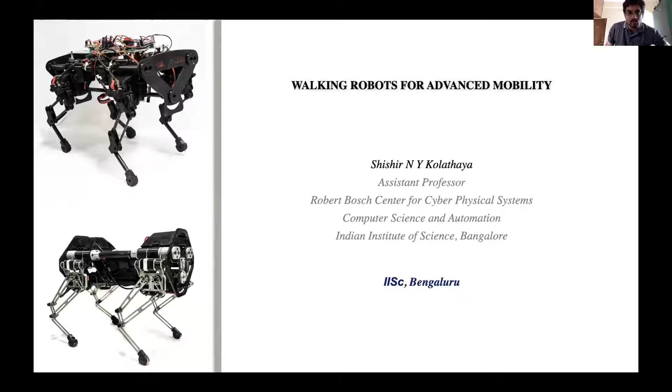I don't see the slides. One second. You are able to see the slide? Now we are not seeing, sir. Now it is not seen. Not visible. This is a real problem. Yes, sir, some technical issue. Okay, now yes, sir, it is visible now. But I'm not able to click play.

Yeah, it is. Yes, sir. You're able to see the second slide, right?

Yes, sir. Okay, so my focus here is actually robotics and machine learning. So I mentioned reinforcement learning. I will talk about reinforcement learning towards the later part of this talk.

But my main background is actually robotics. So I've done a lot of work on robotic systems. And to bring you some perspective on robotic systems, as to where we are in terms of robotic systems compared to machine learning, I wanted to show this graph.

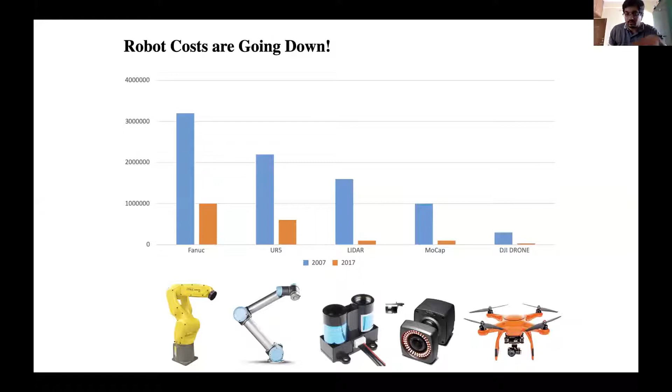Cruise acquires Strobe to help dramatically reduce LiDAR costs. So Cruise is also bringing the LiDAR cost down by close to almost 90%. So that's the reason why robotics, right?

And I have done a lot of work on robotics, and this is a quick look at my background. So I started with this little dancing robot. This was actually during my undergraduate years, where the goal here was trying to realize dancing on this little robot.

Are you able to hear the music? Yes, sir. Okay, great. Yeah, so this is something that I did as an undergraduate student.

And this is what I have as a PhD student. I continue doing work on this. So I've done a lot of work on trying to achieve walking robots, realizing walking robots for a lot of applications. And this is one example where we show it can achieve a bunch of behaviors and even dance to the music.

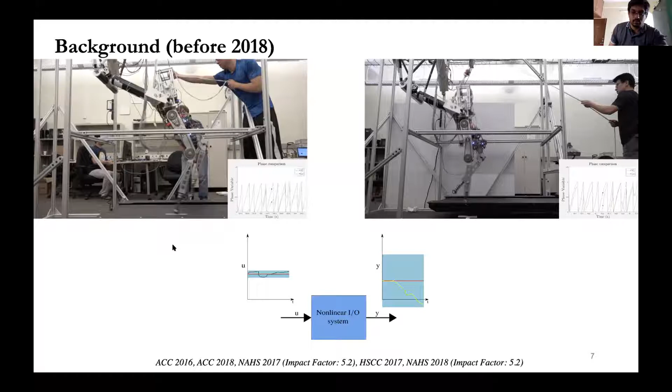But my main PhD thesis was actually running, so this is showing the running robot. Here is a picture of this robot on the left, where I'm actually sitting in the background trying to control the robot, and I'm also assisted by two other people. The goal is to try to stabilize the running gait by reducing a bunch of uncertainties. Here it's actually phase uncertainty, and as you can see, after trying to reduce the uncertainty, in other words improve robustness, we are able to achieve running.

Are you able to see the entire slide? I hope you can. Yes sir, we are seeing. Okay, the whole slide, right?

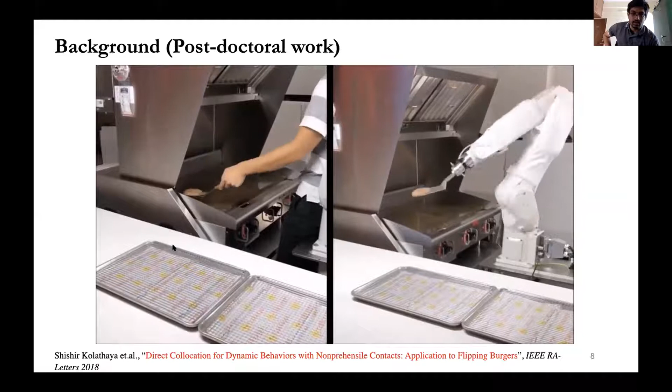Okay, great. So as a postdoc, I've done a lot of work on trying to bring robots into the industry. So this is an example of a robot used in a restaurant industry. Here, this robot is actually moving its spatula from one point to another, trying to move it here and there, and then also trying to flip it over.

So we can see that the comparison between the human and the robot is remarkably very close. In other words, it's super fast.

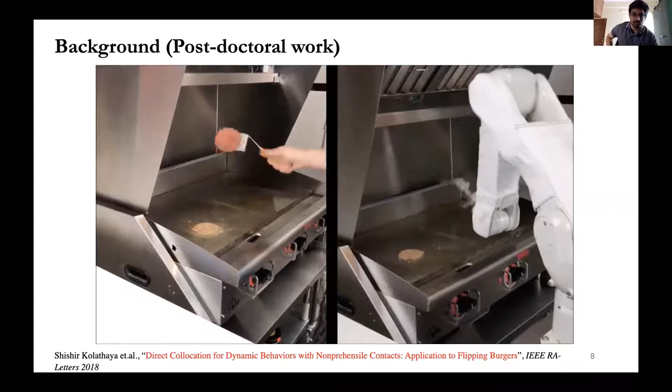Okay, so with that, let me talk about a robot. So what is a robot? I use this definition from Wikipedia: a robot is a machine, especially when programmable by computer, capable of carrying out a complex series of actions automatically. And if you look at the origin of the term robot, it was first applied as a term for artificial automata in 1920.

The word robot itself was not new, having been in the Slavic language as robota, which means forced labor. So we treat robots as laborers, as a slave.

Now the question is, can we use legged robots in the field of agriculture? And is it even possible? Here is a little video which I actually took from my dad's farm. Like I mentioned, my dad is a farmer, and he has been working on this for quite a long time.

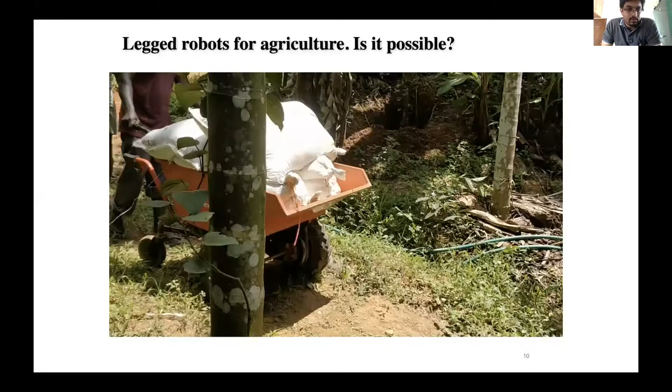This is an example of fertilizer being carried using this petrol powered cart. He is able to do it with ease, but it requires a path. Also notice the other person here actually carrying the pipe, to make the way, to clear the way for this one. So this is something that we have to be thinking about.

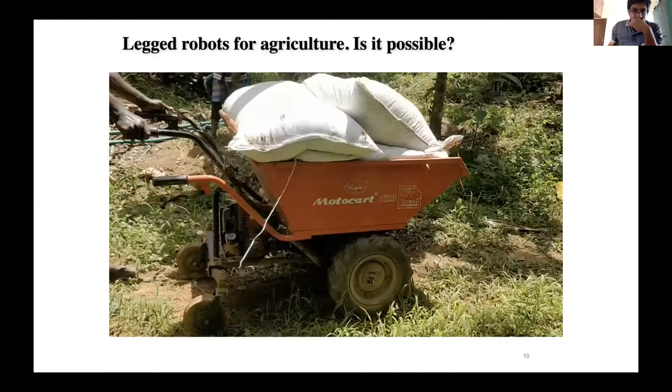Like when it comes to wheeled systems, this pipe is in the way and this is causing a problem. Now, there are quite a few applications that we can think of.

So this is something that farmers are well versed with. Every day they go outside, look at each and every plant. They have to tend to each and every plant. They need to make sure that every plant is growing well. And if there is a problem, then they try to fix it.

Now, this is something that we expect a farmer to do. Now, the goal is to have a robot do something similar. And not just that, the robot has to be able to go across all kinds of terrains, not like this terrain, any kind of arbitrary terrain that is seen on a farm.

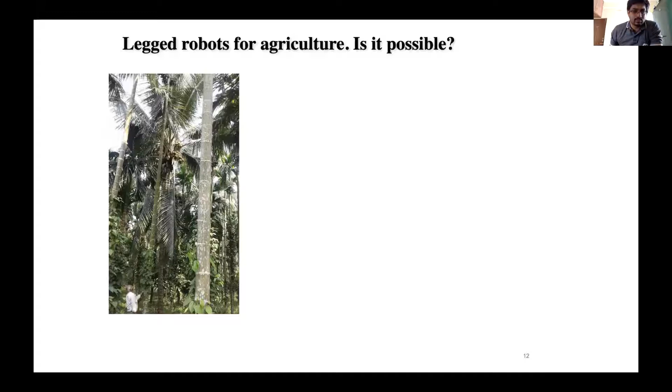Similarly, in the field of grafting, there's a lot of potential use of making this happen, and lots of other kinds of farms too. So my goal here was to try to bring in a one device solution, something like a human.

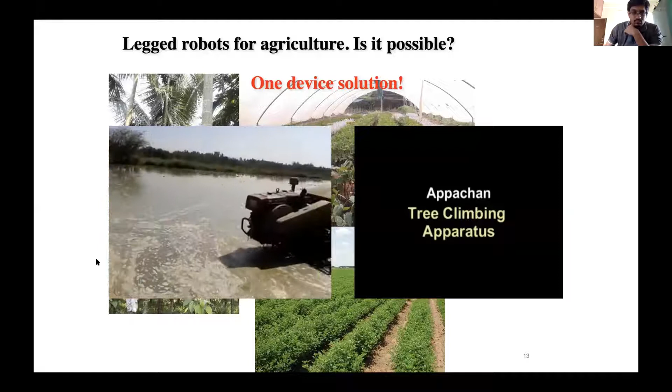On one side we have this tiller being used to till the paddy field, and here we see a person using a remote control to do it. This is one potential application. Here's another application where a farmer uses this climbing device to go up the tree. Now when I look at these two things, these are all very effective, very customized solutions.

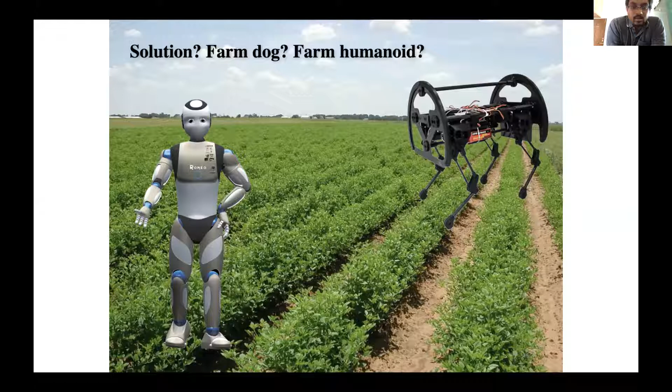I was thinking, why not come up with one device solution to solve all these problems? On one hand we have drones, on the other hand tractors and lots of other devices. Can we think of using a legged system, say a farm dog or a farm humanoid system, that can do a multitude of tasks? The reason is simple: if we have one device able to do a multitude of operations, costs are much lower. It's one hardware, but a multitude of tasks.

That's the reason I use this robot. I bring in this idea of using a walking robot. So we have a four-legged robot which can walk on all kinds of terrains. If you want surveillance, we put a camera. If you want harvesting, we put an arm on this robot. If you want it to climb the tree, we simply write a new controller, and the robot can use the same set of legs to climb the tree.

So this is the solution I was thinking of, although we have a long way to go, especially when it comes to climbing, which is an extremely complicated, harder problem to solve. The moment we talk about this setting, there are thousands of technical challenges, starting from AI and machine learning to real-time control, visual odometry, efficient actuation, stabilizing control laws, rough terrain navigation, safety critical control, path planning, and so on and so forth.

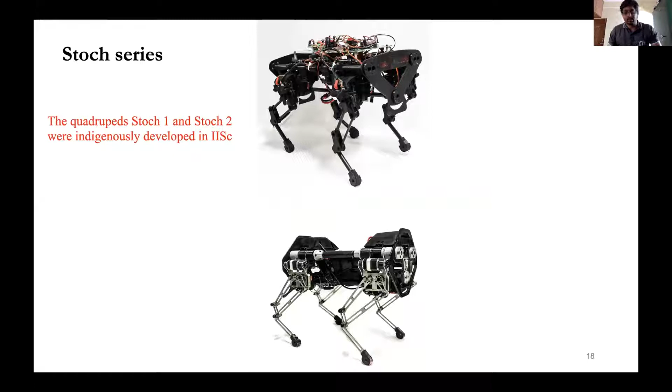So my solution here is to use a Stoch series of robots. The quadruped Stoch 1 and Stoch 2 were indigenously developed in IISc, and I want to talk about how we can build on top of this to a farm situation. Just a disclaimer: I do not have any solution right now for the field of agriculture. I just wanted to indicate where I'm potentially going with these robots.

Now I'm going to switch my attention towards how to realize walking in these robots. One reason is because I do not have a lot of results to show in the field of agriculture—in fact, I have none. Although I'm going towards it, I have a long way to go. Like I mentioned, there are potential use cases for this kind of platform, and there are technical challenges to be solved first before we even talk about using this in agriculture. That is where I am right now.

I hope this is clear. So we have these two robots. Now the first step is to realize walking in these robots, and that is what the whole presentation will be about. I will pause here for a moment to take any questions if there are any.

Any questions? Okay, I'm assuming no questions.

If there are no questions, I will set the goal just to set the tone of this presentation. So the goal is to realize walking in the robot Stoch 1 and Stoch 2. This is what I'm going to focus on, and this is what we have been working on for the past 2 years. We have come a long way.

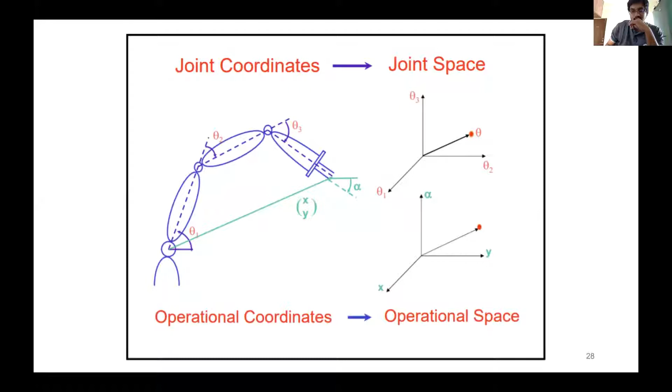So similarly, we have this concept of rotation. I talked about translation, right? There is also this notion of rotation of the end effector, because the way I pick an item, the orientation is actually very important. So we have this rotation matrix, and we want to apply this rotation on the system. There is this matrix called an orthonormal matrix, which we use to realize these kinds of orientations.

Let me just say this, because more than this would be too much. Also, it's not just positions and orientations that we care about, we care about dynamics. We need to make sure that Newton's laws of motion are all well satisfied, and all the forces are meaningful. So we have the Newton-Euler formulation, the Lagrangian formulation, the generalized constraint coordinates, and kinetic energy. This all goes back to 12th standard physics. We need to make sure the physics is meaningful.

With these kinds of formulations, we have different kinds of forces being applied on each and every joint. When a force F is applied on a joint, that F gets applied to the parent link and then the successor link, and this is happening in a repetitive fashion. With this, and with Newton's laws of motion, and the extension of Newton's laws of motion to the field of rotation, we apply the dynamics.

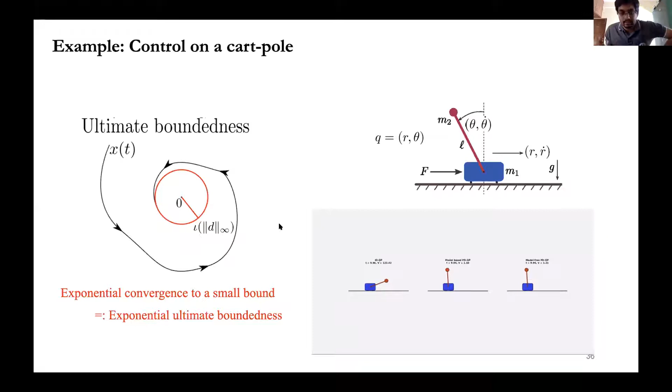The second and the third ones were applied successfully, and the first one is a controller that did not work really well. We actually do these kinds of iterations, applying different types of controllers and seeing which one works. The second and third worked, and as you can notice, it's not perfectly vertical, it's actually oscillating around the vertical region, inside this red circle. So it's always close, but never exactly zero. This is what we have in our system also, so this is a practical scenario.

Now with this, let's talk about walking.

Let's talk about how to use this dynamics idea, this control, and this boundedness idea in the field of walking robots. So the goal is to achieve walking. Walking is an extremely hard problem, and people have been working on this for quite a long time.

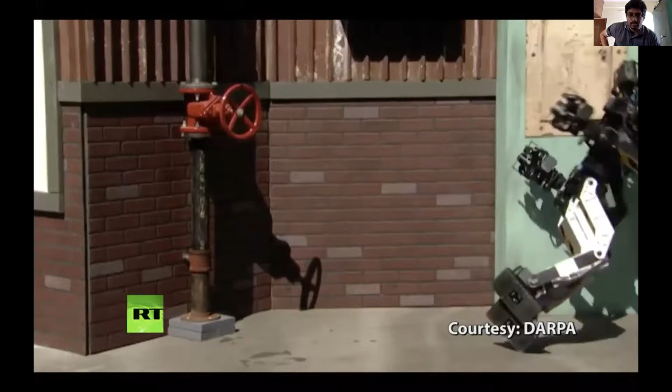We have quite a few robotic systems being tested here. This is actually part of the robotics challenge. So these robots, they walk and then they fall down.

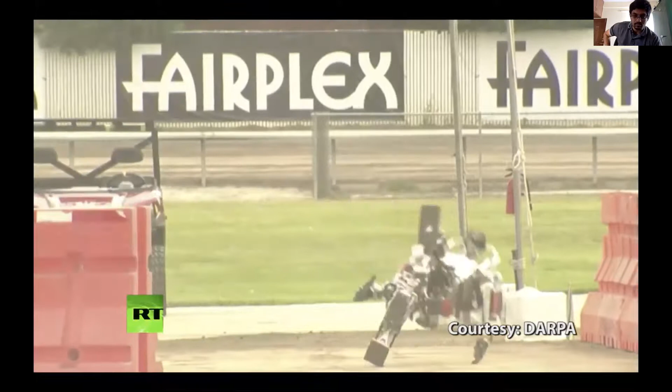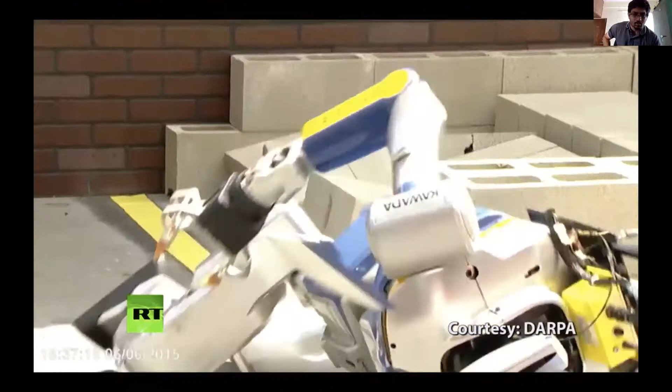So walking is an extremely hard problem, and we have thousands of problems that we need to deal with. Let me play this for a moment just to digest the fact that walking is not an easy problem. This was actually in 2015, not so long ago, and almost all of the robots had these kinds of problems. None of them were working really well.

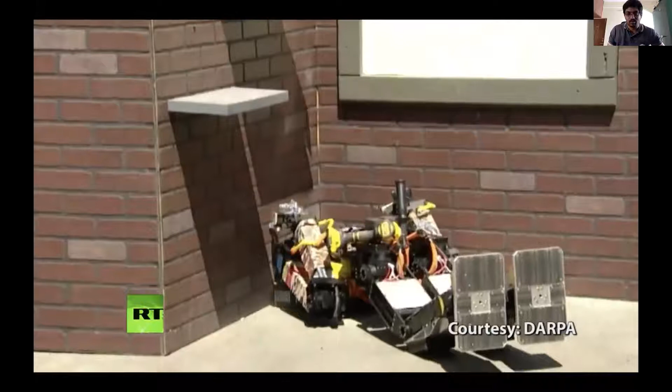If it's not even able to walk properly in a well-designed environment like this, then we can't even talk about walking in a farmland. We have a long way to go. Right, so with that, let me go to the next slide.

So we have used machine learning concepts to realize walking, and it's not just us that has worked on it. Companies like Google have used machine learning, in fact the idea of reinforcement learning, to achieve walking. On the left-hand side, we have this little robot achieving walking by using reinforcement learning.

On the right-hand side we have this bigger robot with a very robust controller, so if you kick the robot it does not fall over. All of these use the idea of reinforcement learning, and that's what I want to introduce here.

There are several positives to take from these deep learning ideas, because we have seen an explosion in AI. Number one, there are a lot of tools available, like TensorFlow, Torch, simulators, GPUs, TPUs, which can be used and are widely available right now. Number two, they are all easy to understand, with hundreds of online resources which we can use to make this happen.

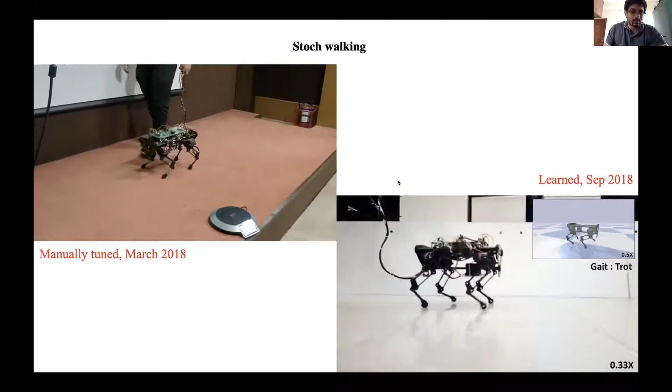...we were able to use this idea of machine learning, to be more particular the idea of reinforcement learning, on this walking robot to realize this. As you can see, the slow motion version of this robot itself is much faster than the normal walking speed of the robot on the left, so in terms of efficiency it is much, much better.

So here is the general framework that we use to realize walking. We have a little walking controller, shown in a box. It's usually a tracking controller with some auxiliary inputs, and this walking controller sends in some actuations, some action values.

So we have actuation and then we have sensing. The sensing uses some sensory values and sends it to the controller, and the controller uses the actuation to actuate the robot. With this walking controller, we have a policy network which we want to use, let's say a deep neural network. I use the same idea: I sense the values and then feed the actuation.

Any questions so far? Sir, I think in the chat box they posed questions. Oh, chat box has some questions? Great, yes. How do I access it?

Someone asked, Siddhartha Shankar, what are the parameters? Which parameter, oh the parameter theta? I think somebody said Siddhartha. I would like to call upon Siddhartha Shankar Acharya. Sir? Siddhartha Shankar Acharya, sir. Hello?

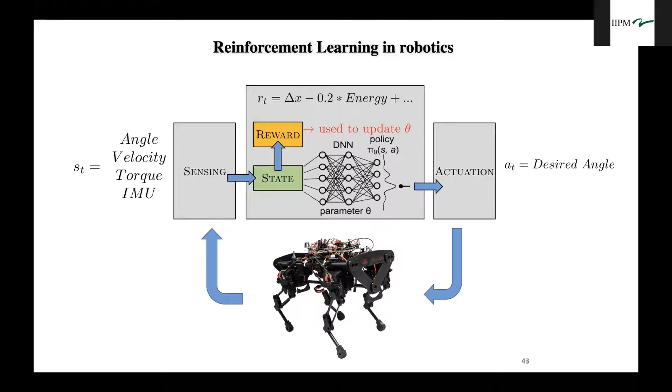Okay, so we use this specific form of reinforcement learning called policy gradient. There's a lot of theory that has gone behind using this policy gradient, and the idea is actually based on using this policy. So policy gradient basically tells me, okay, if I have a high reward because I applied this action, I want to use more and more of that policy. This idea of using policy gradient actually helps me do this, so we use a lot of these policy gradient techniques to realize walking.

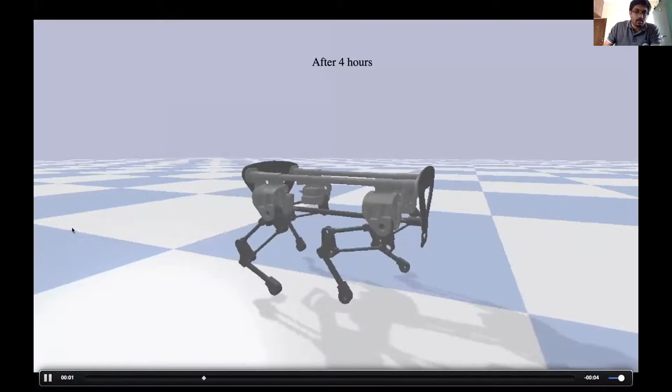So here on the left, we have this example of the training procedure at the beginning. Sorry, okay, so the left video is not working for some reason. I'll show the right video. The right video shows walking in the middle of the training, and it's actually barely somehow trying to figure out how to walk. Notice it's continuously calculating the energy consumed, continuously calculating the distance traveled, and after 4 hours, we have walking. In other words, it's able to continuously improve the rewards as a function of time.

Right, finally we implemented on the robot in this corner. So while the video is being played again, I can take any questions.

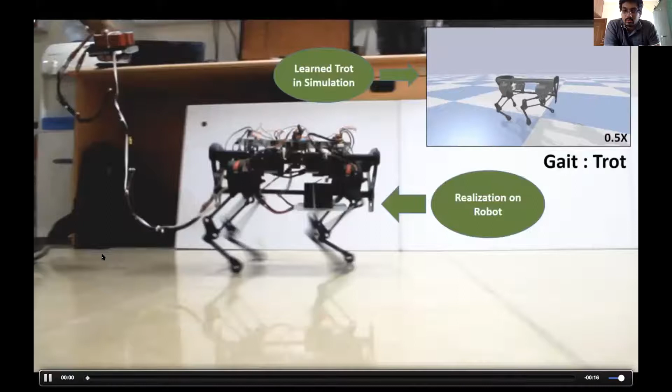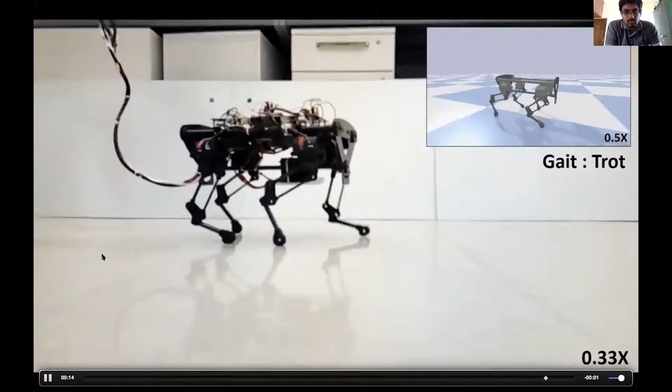How to decide training method to work? So the question is how to decide the training method for the network. Dr. Ram Prakash, can you be more specific, can you ask this question again? Okay, so let me roughly try to answer. There are quite a few training methodologies that are in use. Some are effective for some use cases, others are effective for other types of use cases, so there is a variation, and we decide based on what is useful for us. In our case, we use a lot of policy gradient based techniques, and that's the reason why we have this training method. But training methodology in general itself is a big area, and that requires a careful look at the problem statement, more importantly. I hope that kind of answers your question.

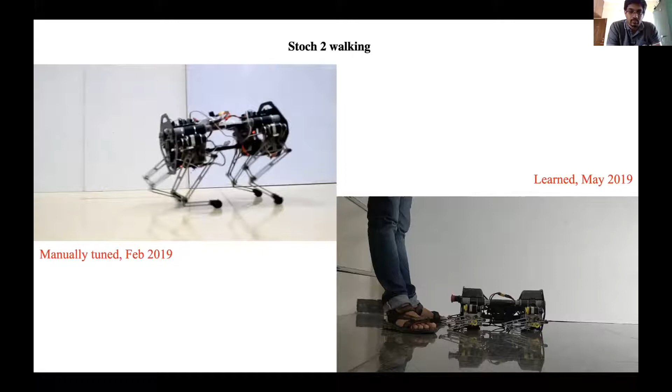Okay, let me go to the next section. So now let me talk about Stoch 2. Stoch 2 is actually a second version of Stoch 1, where we have made a lot of improvements in the robot. The legs are metallic and a lot of hardware improvements have been made. Just to give you an indication of where we were at the beginning, this was in February 2019, it was barely walking, and fast forward a few months and it's already walking really well, very, very robustly.

So here we are actually using this as a gait generating platform. Just to give you an idea, okay, we have policy gradients, what more can we do? And yes, we can do a lot more than that, and we are going to use trajectory generators, and that was the goal in this project.

So here we have this little video of a cat walking. Not sure why it does not play, so it plays when... it plays when I'm not sharing the screen, but for some reason it does not work here. Okay, so let me continue.

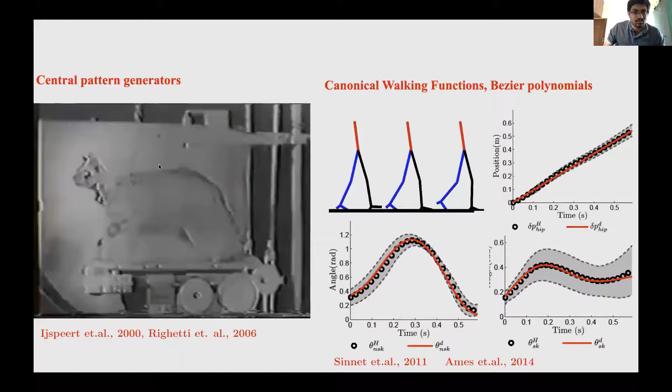So here we have this cat walking on the treadmill, and the point here that I was trying to make was this cat is able to walk really well, despite the fact that the spinal cord is severed. In fact, this is a very interesting problem statement for biologists. In other words, actually the patterns are generated at the spinal cord level. So we are using this idea of using this neural network at the spinal cord to generate these trajectories. On the right hand side, we are seeing a very similar trend, we have this walking data captured from humans.

We can see that the fit, shown in red, on the data, shown in gray, is actually a really good one. This is with a very high correlation. And what's interesting is that this trajectory is actually a very simple function. In fact, it's a low order polynomial.

My point being, instead of applying the system directly, the goal was to use a trajectory generator on the system. So we have this reinforcement learning framework, and we update these parameters in such a way that the trajectories are modulated accordingly. So here we have this walking on this robot accordingly, with these trajectories being applied on the system.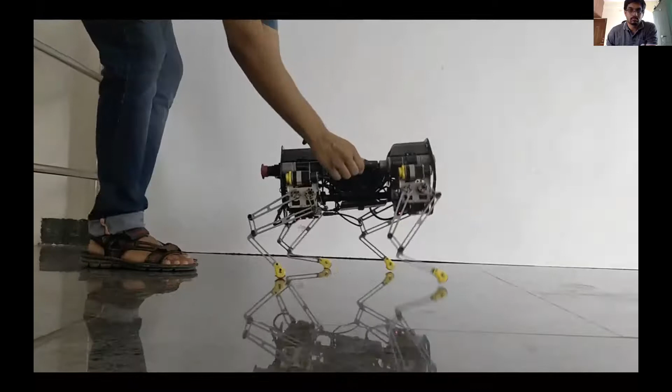So I hope the video is clear. Okay, any questions so far?

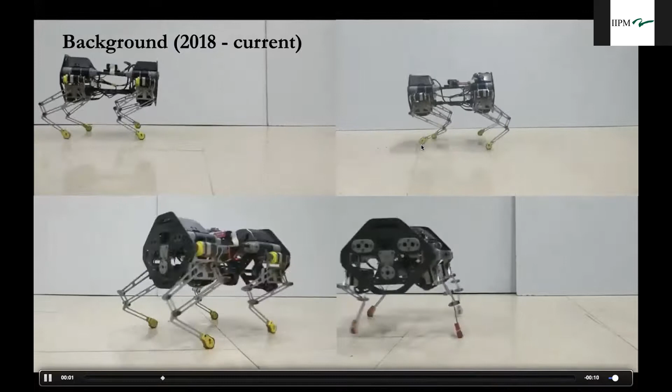Okay, let me go further and talk about the next steps. We have agriculture, not only agriculture, but also construction, transportation, and a lot of other areas in mind. Agriculture is certainly my top priority.

As you can see, the robot we have in our lab is actually a very small robot, not a big one. You could make the comparison by looking at this person - it's mostly 2 times the length of the foot. So this robot is not all that big.

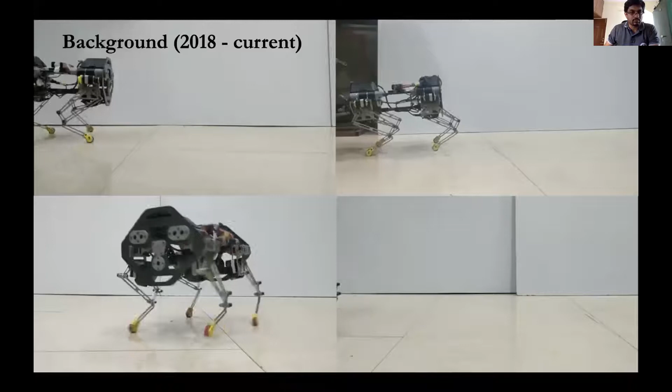That's the reason why we decided to go for the next robot, which is Stoch 3. Stoch 3 is going to be much bigger, and hopefully we should be able to get this walking robustly. Once that is done, we are going to go ahead and test it on different kinds of terrains, including farmlands.

We have Stoch 3 working partially in simulation - for example, it's able to walk straight and do backflips. This is still under production. We still need to buy parts, test the controllers, and make sure nothing is breaking. So we have a long way to go.

This is in collaboration with faculty Bharadwaj, Shalabh, Ashitava, from the Robert Bosch Center for Cyber-Physical Systems. We are developing a bigger, stronger quadruped Stoch 3 at IISc. Hopefully by next year end, if there's an opportunity for me to give a talk again, I should be able to talk about the results on Stoch 3.

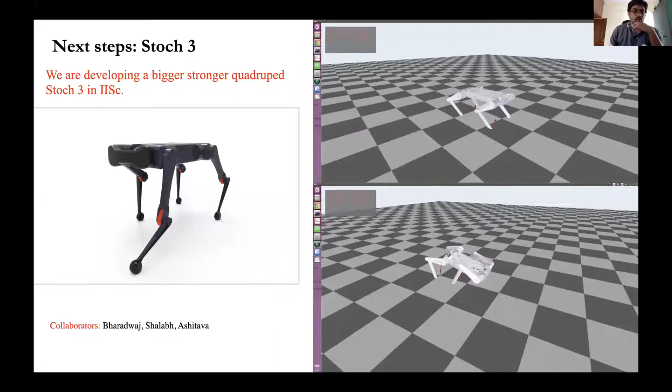So just to give you our vision at the Center for Cyber-Physical Systems - we are actually interested not only in AI, but in deploying AI in real hardware, because that is where the real challenge is right now. On the left-hand side, we have this mind.

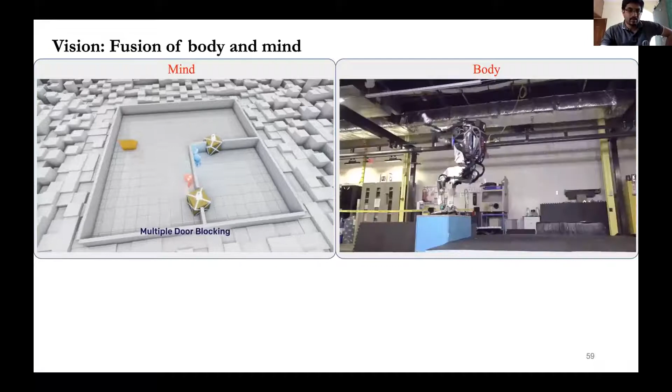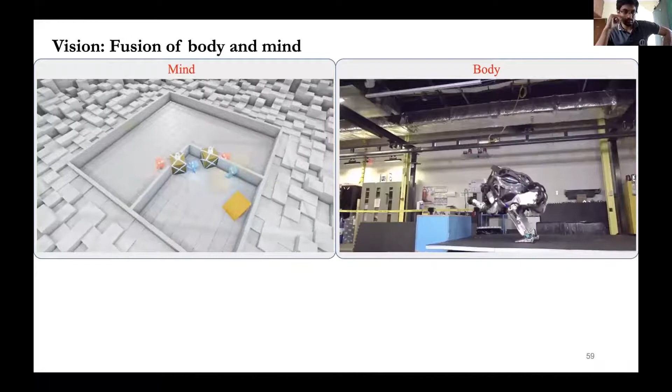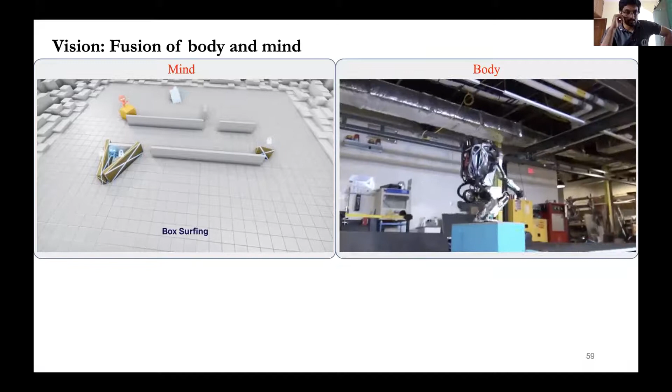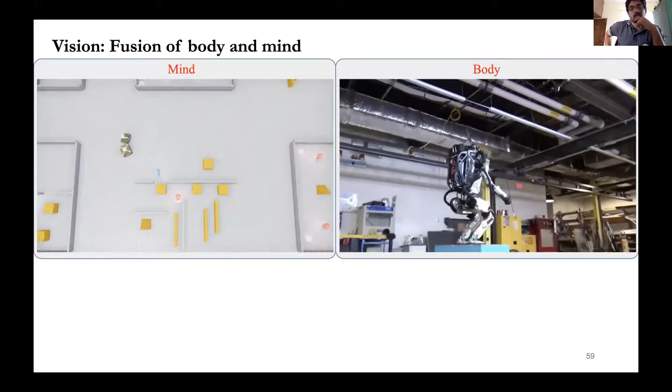This is the power of AI and machine learning, and that's the reason IISc is also hosting a conference, a workshop based on this. On the right hand side, we have this robot that can do remarkable backflips - this is from Boston Dynamics, doing amazing behaviors. But these are not taught to the system - the robot does not learn these behaviors. They are all hard-coded by a human. That is where the difference is.

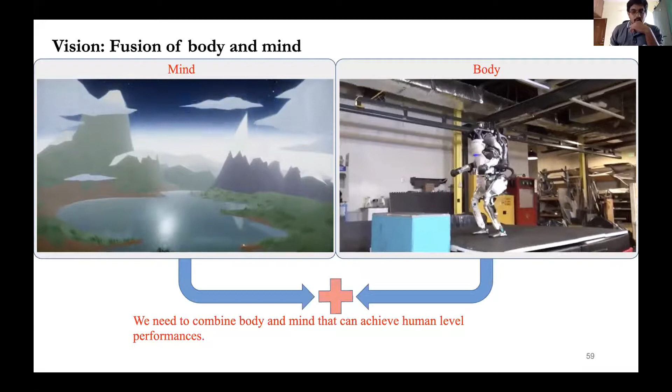We want to reach a point where we can combine body and mind to achieve human-level performance. In other words, we want to achieve in a robotic system what even a small baby can figure out all by itself. These are all very complicated things and not easy. On the right hand side we have amazing hardware results by Boston Dynamics, by Google's Waymo driverless car technology, and so on.

On the left hand side, at the top of the graph, we have amazing machine learning and AI-based results from OpenAI, Google, DeepMind, Microsoft, Facebook, and other companies. The goal is to move beyond these two - we want to combine body and mind. We want to give a body to the results from Google, and give mind to the results from Boston Dynamics. That's where the goal is.

Robots like humans, alongside humans, building autonomous systems that improve quality of life. To give an example, I already showed this little dancing robot - this was hard-coded. So now the question is, why not let the robot figure out the dance moves by itself? That is one intelligent behavior we can think of - there's a lot of creativity involved.

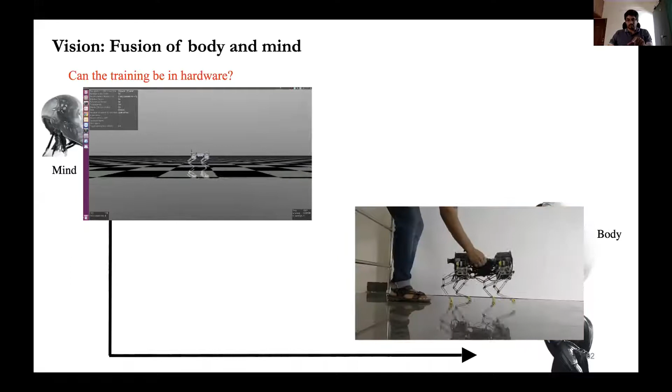We have walking in simulation, and we have walking in the hardware, but the training does not actually happen in hardware. This is something I never pointed out, but it's a fact: we never train this walking in hardware. We first train it in simulation, and then once it is fully trained, we deploy it on hardware.

So we want to talk about training in hardware itself, in an online kind of way. Similarly with imitation learning, we are actually doing something similar. Like we have this peg-in-the-hole task in simulation, and we are able to implement this training procedure in the hardware itself. It required a lot of work, but this is actually a start.

So here we have this little video of this robot trying to insert the peg inside this hole, and the clearance is actually very, very small. It is close to 30 micrometers, which is very complex, not easy. So we have used a combination of control and learning to make this happen. In other words, pure learning alone will not help - it's not enough. We need to do a combination, and that's what we have done.

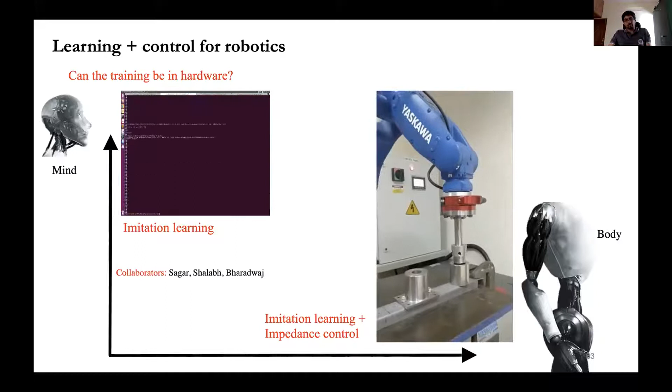And not just that, when we talk about machine learning, we need to care about safety, because right now, unfortunately, there are no guarantees of safety. People are talking about driverless cars today, but nobody is talking about how safe they are, because it's actually done by a learning agent, and the learning can be very complex. There are no guarantees of safety when it comes to learning.

And if you are familiar with Asimov's laws - how many of you have seen the movie iRobot? Not many of you may have seen it. iRobot, I think the lead was Will Smith. In that movie, the computer takes over the world by simply deploying more and more robots. This is against the first law of robotics: a robot may not injure a human being, or through inaction allow a human being to come to harm.

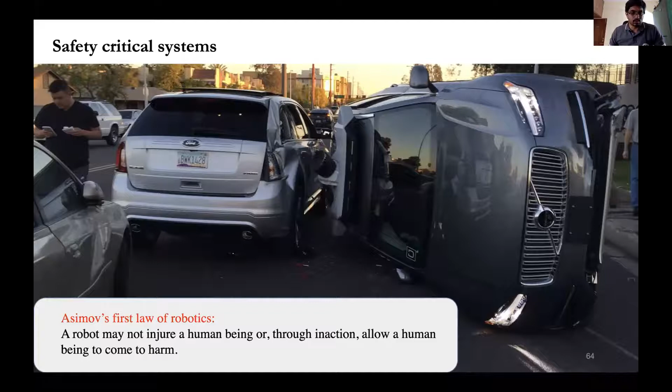The current control frameworks that we have do not satisfy Asimov's first law of robotics itself. And this first law of robotics is actually a very old law - it came in the 1950s, 1960s, 1970s, in that time period. So we have a long way to go. We have no guarantees at all when it comes to the safety of a human being around these robotic systems.

And we are obviously doing a lot of this work. For example, we are making sure that safety is our priority in our lab. If you come to our lab, you will see this notice outside: safety is our biggest priority, and the director always keeps asking us questions on safety aspects. That's why we are compelled to do these things, and we are already doing significant work in that direction.

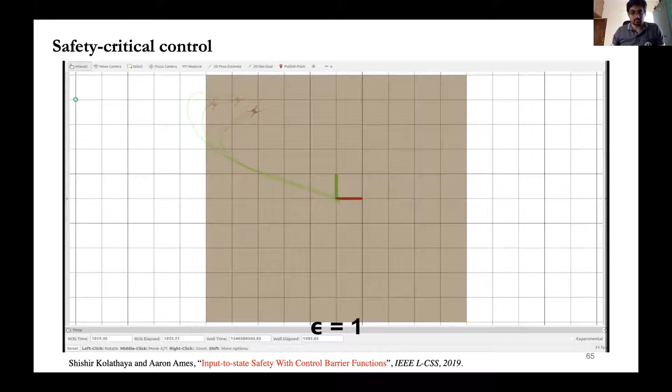So here is an example of a drone. The goal was to go to the destination point, but there is a safety boundary - this brown region. So the brown region is where the safety boundary is; it's not supposed to go outside. Even though the target point is outside the boundary, the robot should not go outside it. We are able to get it working in simulation, and it's only a matter of time before we deploy it in the system.

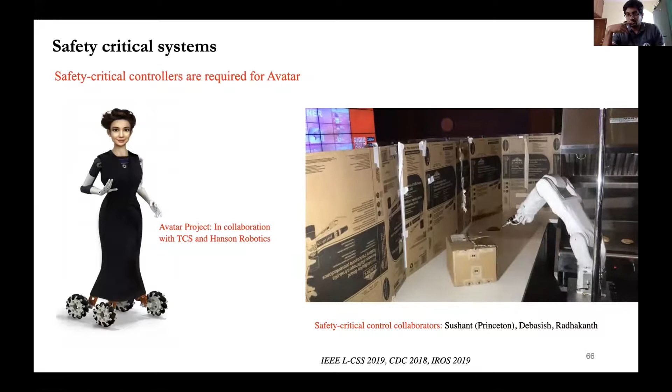So here is the robot doing this transportation task, moving from left to right. And suddenly, when I throw a box, the robot has to detect that there is a box and it has to stop immediately. So this is actually safety critical control happening in real time, and this is actually very, very important.

So with that, let me finish and let me hand over the presentation to Karthik. In the meantime, if there is any question, I can probably answer them.

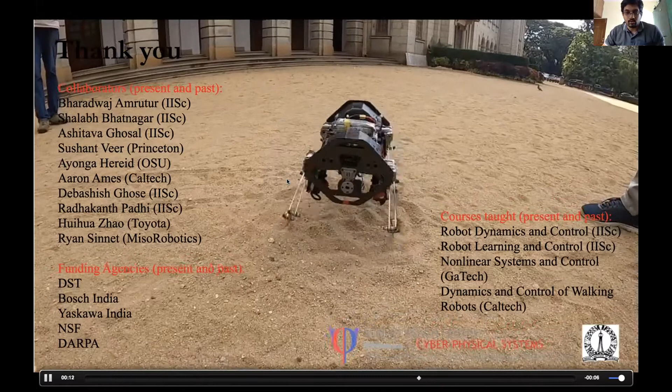Okay, so there is already a question by Kishore: Artificial intelligence in agriculture is a new and trending topic in the present Indian scenario. Much more research certainly needs to be done to suit robots and drones for small and marginal land holdings, which likely constitute 70% of Indian agriculture. So how does an agriculture engineer proceed in this area of specialization, who has no basic knowledge in electronics, but knows much about soil and plants?

Okay, so I guess the question is for small land holdings where there is a farmer who is an expert on how to farm, who is an expert in plants and soil, but has no knowledge about the electronics or the technology or the machine learning or the robotics.

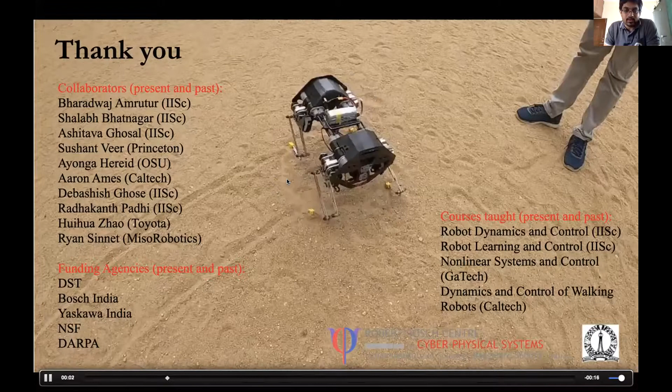So this is where we have to talk about involvement of a bigger community. It's not like one person can do it all. We have to understand that we are in an age where interdisciplinarity, collaborative effort is actually very, very important.

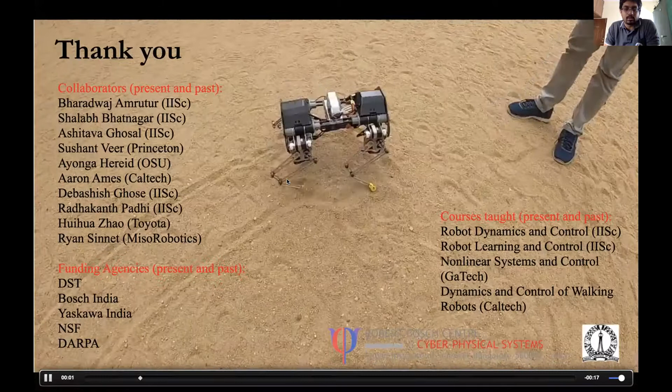Take the example of vaccine development. Several countries are involved in making this happen, and there are several research labs collaborating with each other. This is not only true in a country like India, this is true in Europe and America itself. So when we talk about developing new technology, new methodologies, there has to be a greater involvement of communities from various backgrounds, and we at IISc also stress on this fact.

I know I'm not really a farmer, even though my father is. I have a long way to go when it comes to farming. I do not even have the basic knowledge on how to grow basic produce. But I'm more than willing to take inputs from the farming community and make this happen.

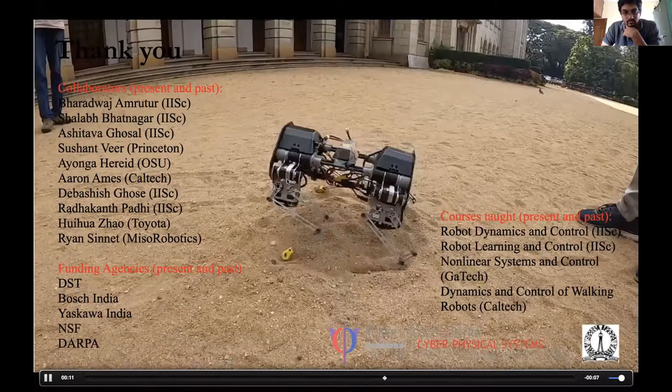And this is not something that can be done overnight. I understand 70% of the land holdings is marginal land holdings. But there are several strategies, several solutions that can be deployed even in that scenario. Right now, my focus is to actually make it work, get it to work in a farmland.

We are not even in a situation where we can say we have a solution. We only have walking, we have a long way to go. But this is something in the pipeline that we can think of. So did I answer that question, Kishore?

Yes, sir. Thank you, sir. Yeah, okay, so Karthik, any other questions?

Shall we use the robot for collecting samples of coronavirus from human body for testing purposes?

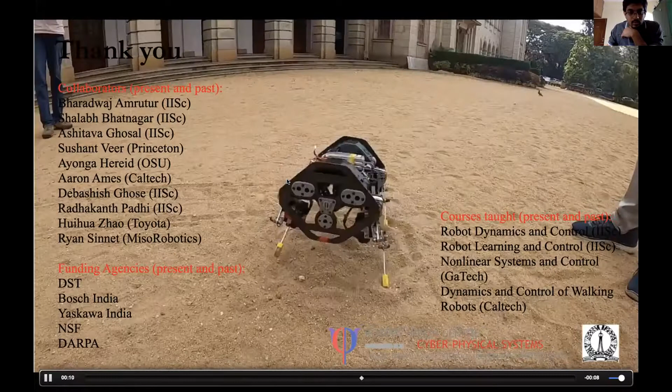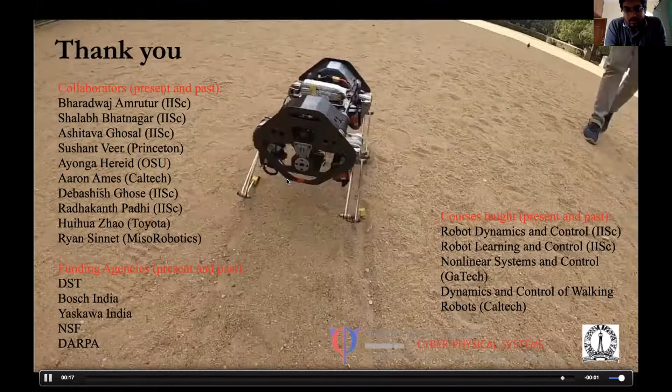That's a good point, and I believe there are some companies that have tried it, but also understand collecting samples, the biggest challenge is actually using the procedure for collecting the sample, where you have to insert that thing inside the nose. So I don't think robot technology is mature enough for doing such a thing, because even though robots are not... and I don't think we are actually in a situation where we can do such a thing.

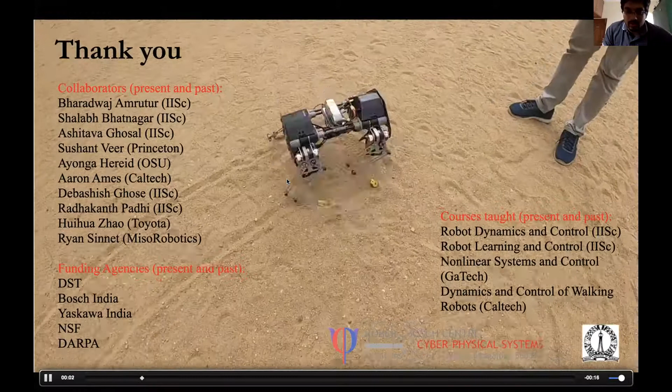Even if you are able to do that, it will be super expensive, and I do not think it can beat the Indian labor at the moment. I think that the need of the hour for the coronavirus pandemic is planning, is logistics, and quite a few research faculty in IISc themselves are trying to work on doing the logistics.

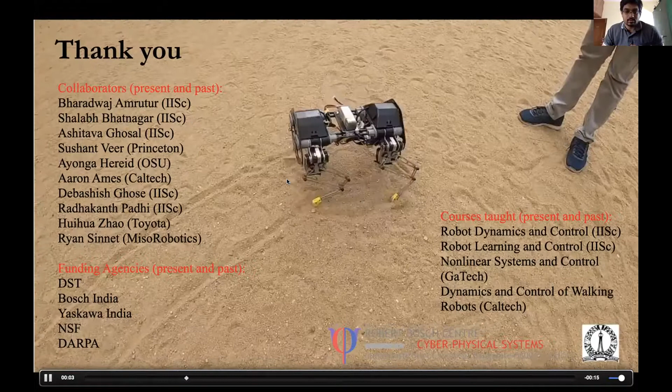For example, there are testing kits available, let's say in Belgaum. There is an excess of testing kits, not a lot of cases. In other words, the testing labs are testing very few samples per day, way below their capacity, while the testing labs in Bangalore are over capacity. Now, can we think of a logistics planner where we can transport the testing kits, or maybe transport the samples from one lab to another in order to get faster results?

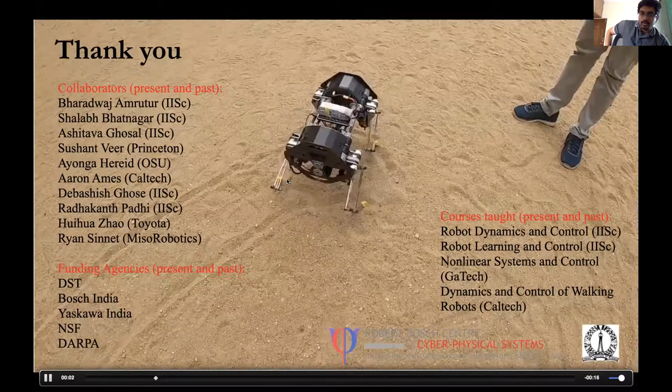So that is actually more of a logistics planning optimization problem that can be addressed right now, and people are doing it already. In fact, the Bangalore, Karnataka Healthcare Department itself is using that solution to make this happen. But deploying a robot for collecting samples, I think, is not economical at this moment, because robots still cannot beat Indian labor in terms of economy. So we have a long way to go.

So even when it comes to robotics in the field of agriculture, we can look at specific areas where safety is of prime importance. And that's the reason why I showed the example of climbing. Climbing, yes, it's a safety issue, because going up the tree is actually very risky for a human being. So that's where we can think of using a robot.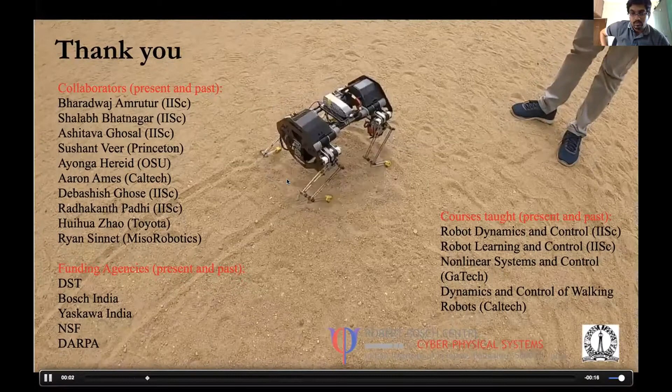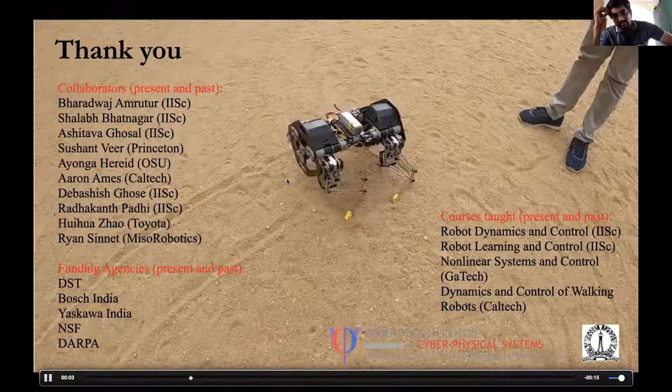Surveillance is still not in the pipeline, because you can always send a farmer to walk around the farm, because he does this round anyway. Every morning he gets up and looks at each and every plant and comes back home. That's not a difficult task which anybody can do. So we need to focus on problems which are risky, and I think climbing is a great avenue for this to happen.

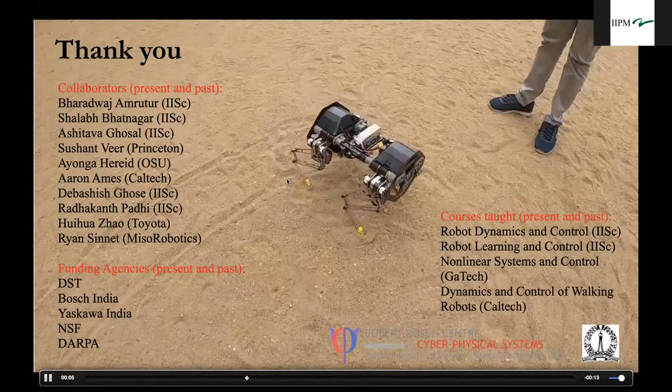Any other question? I think it's a question from Ishwarappan, Dr. M.N. Shall we use robotics for collecting the samples? That is what you explained, right? Yes, that is what I explained. So Karthik, you want to take over?

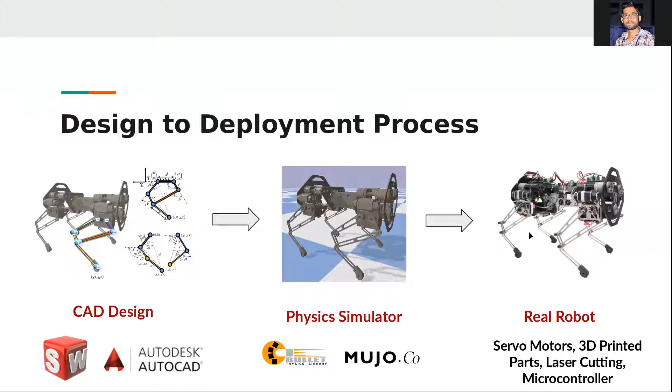I will give a short detail about how a robot model looks like. To define a robot model there are a few formats, and one of the famous formats is URDF. It is actually XML, where you can define your links and joints. As explained earlier, a robot consists of links and joints, so the URDF consists of this information, like what is the axis of the links and what is the inertia of the link.

I will show how the XML of our robot looks like. You can see this is the motor joint at the upper knee. It is a revolute joint, and it has its axis at this location. This joint has a parent link, the front left body abduction link, and the child link is the front left upper knee link, so in between two links there is one joint. Here are other dynamic properties like damping and friction.

In this way the robot URDF is built; it is a tree structure. Now I will quickly tell you how we actually build the simulation, how we can build a simulation environment. Once you have a URDF, you load that URDF into a simulator. Then we create functions like reset, assign motor IDs, get observations, etc. Once the robot is loaded, we have to reset the joints to initial positions. For our robot, we reset the robot joints to a standing position so that it stands at the beginning.

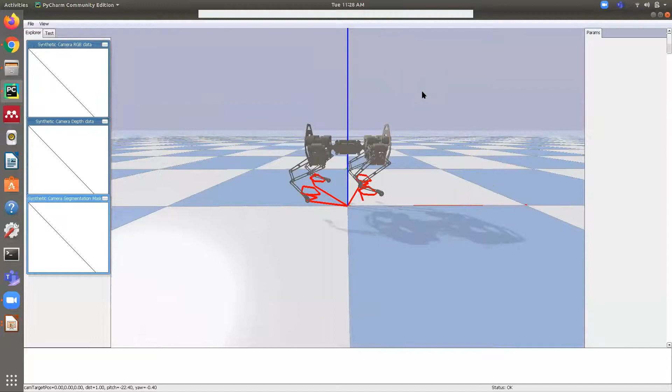So this is our simulator. I have loaded the robot and kept it at a fixed position. The red line is the trajectory being tracked by the robot. It is currently a semi-elliptical trajectory, but we can use any other different trajectory.

So this is the simulator. We can have different view angles.

Mr. Karthik, it is not coming.

We focus on evolutionary strategies, which is very simple and draws its principle from the natural selection process. We create samples of a policy matrix, and from that random samples, the policies which give better reward are chosen for the next update. Just like in natural selection, where the fitness of the population is evaluated and the next population is mutated and regenerated accordingly, this technique is similar. Here, instead of population, we have policy parameters.

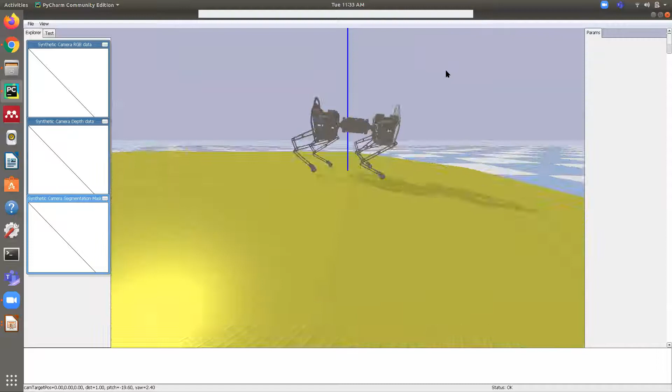I will show a few more results of our policy. Now I will modify the orientation of the incline, so the robot is moving uphill. Similarly, we have achieved locomotion downhill - you can see the robot moving down the slope now.

We have a few more challenging environments, like stairs.

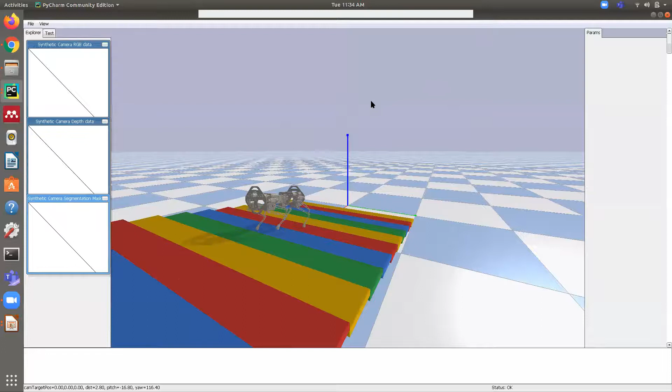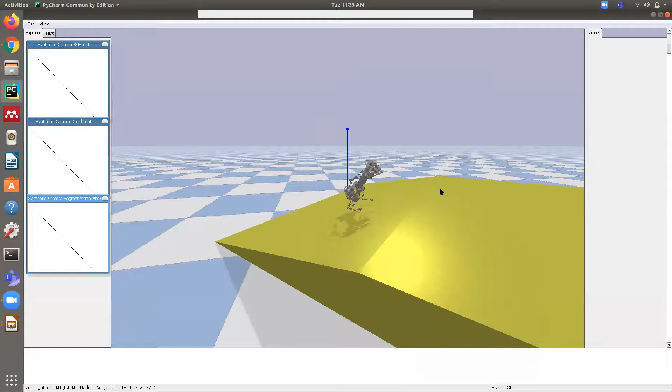I can also disturb it through my mouse, but that was way too much force. After applying a lot of external perturbation, the robot is still able to balance itself. This much robustification we have done in our policies.

So this is the end result, basically showing walking on slopes of any arbitrary inclination and orientation. This is a track we built - you can see there are different wedges joined at different inclinations, there are stairs, and there are pyramids.

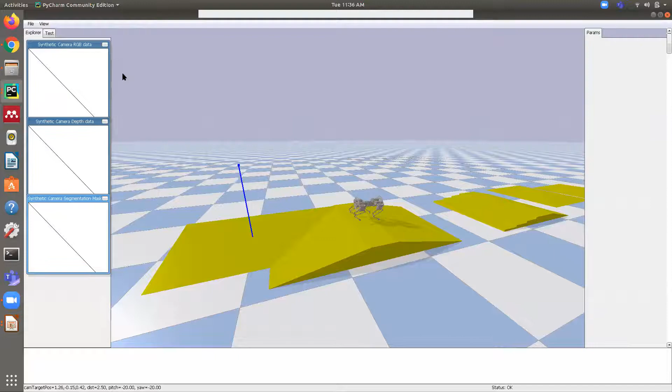Maybe we can see the entire video on YouTube.

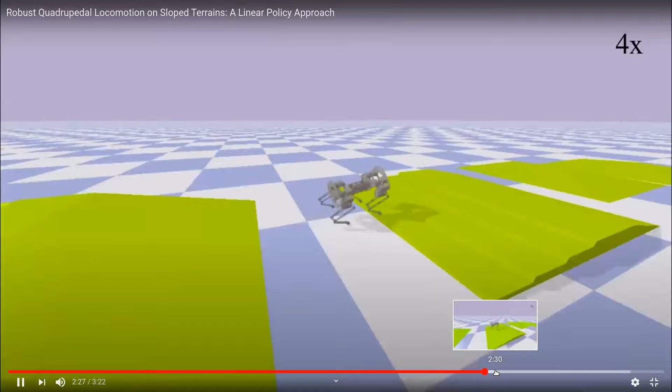It is able to climb a very challenging pyramid. So these are some of the results we have for walking on different terrains.

We are working on vision related tasks too on the robot. Now let me show some of... why is it not... I think there's some issue with my setup.

Here we are trying basically to climb any unknown terrain, like stairs. Stairs are a very difficult environment for a robot to walk on. In our previous research, we used a staircase of standard dimensions, and since it was also trained for that staircase, it was able to climb up. But if we modify the stairs to a different height, or if the risers and steps are of different dimensions, then we require good vision capabilities in the robot.